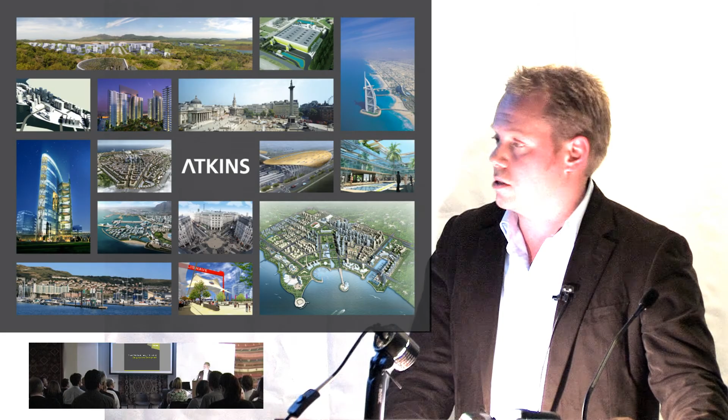I'm a principal landscape architect and urban designer from Atkins. About a year and a half ago, I was involved in the review of the way that our London team and our international businesses approach our master planning services.

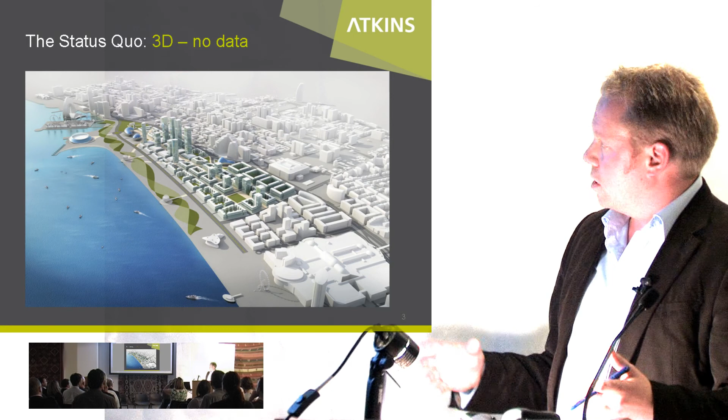Before I get into the tool and its application, I wanted to dwell for a few minutes on this image. This is the sort of thing we would find in any of our design documents, any design-led documentation that might come forward for a major master plan. It could be a third of that size, it could be 3-4 times that size, but ultimately the content is the same. It sets out to communicate a vision to the client and show them what our spatial design approach is for the site, and what they could expect to see if they took this vision forward.

What it doesn't have is any underpinning in terms of data and analysis. Atkins, along with many other practices out there, puts itself forward as a multidisciplinary practice, and we pull together multidisciplinary teams to give the client a robust approach to master planning.

But the reality is that if the client wanted to workshop this with us, and we made design changes, for us to come back to them with things like population numbers, utilities demand, transport demand and all this sort of thing, it would have to be remeasured. The measurements would go to our planning department, they would give us updated population numbers, that would go to our utilities team, who would analyse that and come up with updated utilities demand. We have these loops of activity, and I'm sure that's the same within any other major practice.

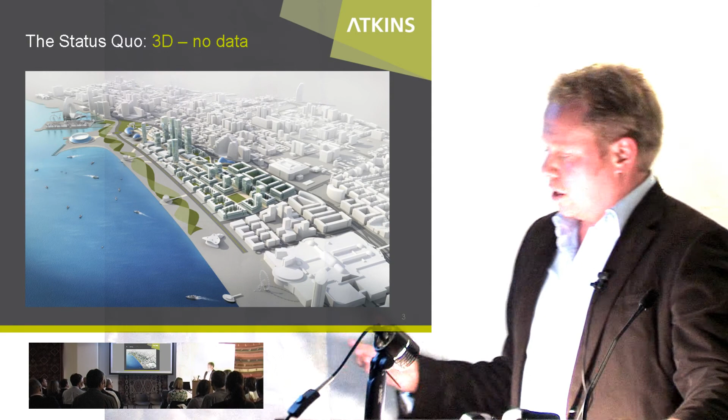This set us thinking about the revolution in BIM that is happening predominantly at an individual buildings level, whereby you have a central model, or central asset, which all the teams contribute to, and that in turn brings forward all of the data. Everything from utilities kit to materials to roof area for contractors and facade and everything else would come from the same model, and one design change would knock through the whole package.

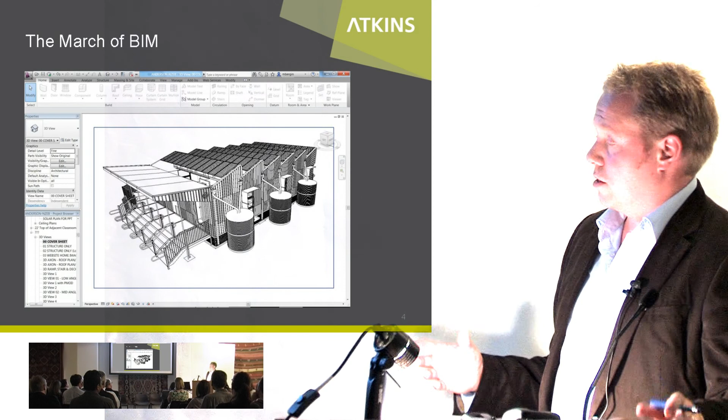So we started looking for an approach along these lines that we could take forward for our larger scale master planning work, up to and including the metropolitan scale. We looked at various packages, and some were more suitable than others. Autodesk openly said to us they thought it was a square peg in a round hole for us to use Revit, so we didn't take that forward.

And we ended up talking to a small company based in London called CityCAD, or Holistic City. CityCAD are a young architect called Chris Sharp, who I think comes down here every now and again, and a Russian mathematician called Svet, and their band of merry men. What they've done is build a tool specifically for master planners, and I think they worked with the University of Westminster, which is my old university, through the development of the tool.

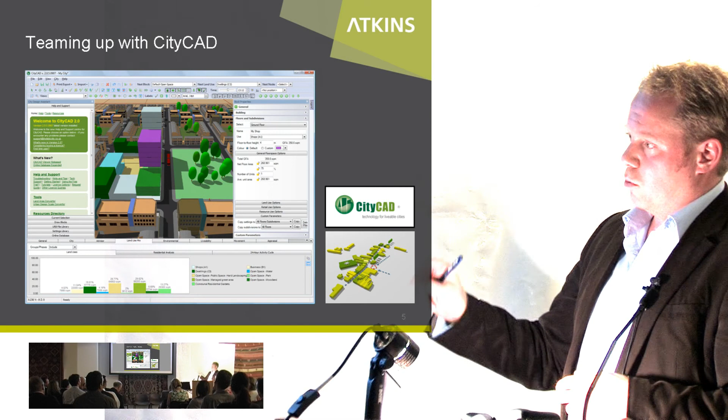What it does is, through a 3D interface which is very simple and intuitive to work with, allow you to track a whole range of parameters. In fact, every metric that you would want to look after and nurture as you developed a master plan, in one place and in one program. So one change to one building, a floor in one building or 3 buildings, would knock into population, trip distribution, all of this sort of thing.

In parallel with this, Atkins at our top group level were commissioning from within the company a series of carbon tools, and our chief executive Keith Clarke at the time was interested in putting together a portfolio of tools across our whole spectrum of businesses that allowed us to respond to some of the questions we were starting to get from our clients about how they respond to the climate change initiative and the carbon benchmarking of their projects.

Some of my colleagues in the planning team and sustainability put together a brief, which was ultimately accepted, to develop a master planning tool. So what we did was commission CityCAD and work closely with them to develop a custom version of their application, onto which we've bolted a web-hosted database which holds all of our carbon intelligence, if you like, and that talks directly to CityCAD and the custom version of the CityCAD user interface.

We've done a lot of development on the environmental capability of CityCAD. It was fairly crude before. But what we've done is talk to all of the various specialisms within Atkins to work with them on exactly what, if we were asking them to work within this model rather than in their own typical sphere, what are the knobs and bells that they would want to see and be able to manipulate to make the tool valid for their use.

So the tool in practice, I don't know whether anyone's seen it up and running. This is Atkins' custom version of it, and there are three basic parts to the tool, or its user interface, and I'll just quickly outline them.

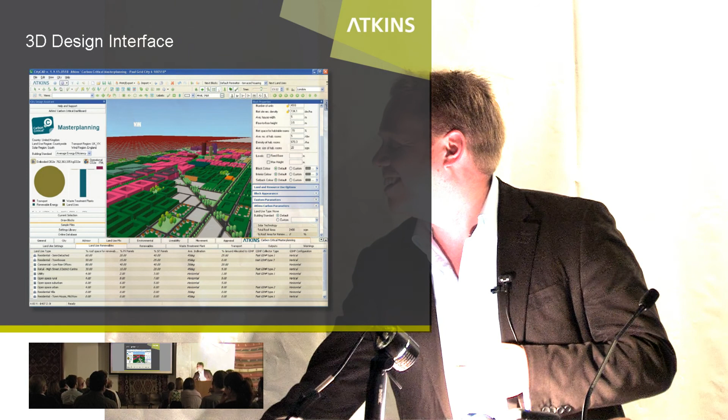The panel on the left is our summary carbon panel, which tracks the four key constituent parts of an overall carbon calculation: transport, waste, utilities and land use. So this gives us a kind of ready reckoner at any point.

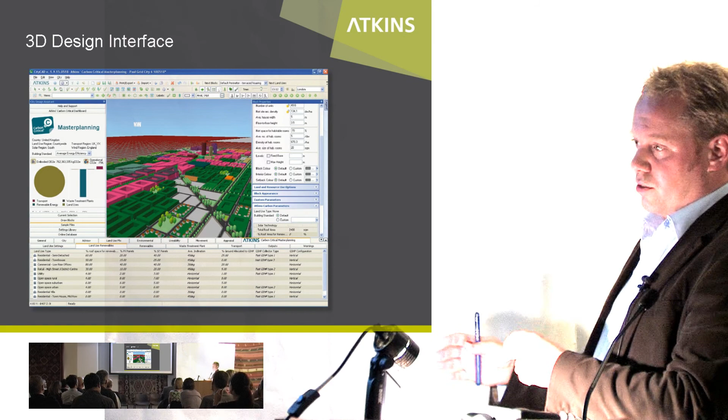The beauty of this, of course, is that because it's all based on a 3D interface, you can be sat with a client and the design team, and any change to any building or element, which can all be done quickly and intuitively, knocks right through the data set and changes all of your calculations on the fly.

A couple of our previous speakers have really touched on the idea that a new approach to master planning is needed, and that was something we were very keen on from the outset. For us as a company to do something where we could all work together in a way that really brought multidisciplinary teams together properly, where one change from one member of the team was an instant change and not something that involved us waiting three days for them to go through their loop of activity. It also allows us to bring our clients with us a lot more strongly.

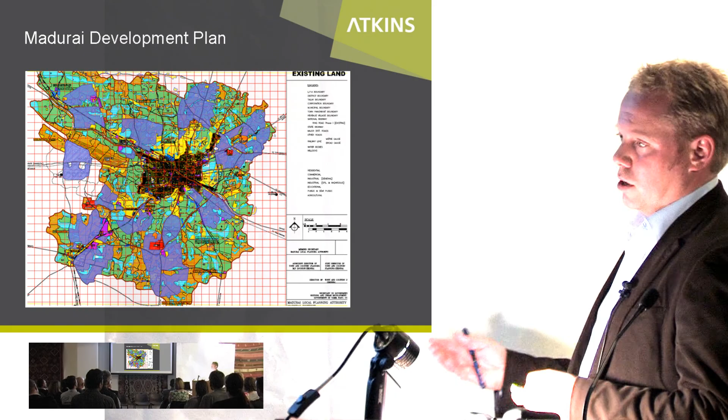Pretty straightforward stuff. But what we were able to do with the tool was to extract these hubs in their correct spatial location and plug them into CityCAD, assigning them the correct land use based on the urban typologies and land uses sat within the database from all the research our Indian colleagues had done and the data set that had been put together.

So the model effectively sees these mixes, and you can see one of the mixes being interrogated here - that's a land use mix for one of these cells. And it sees them spatially, recognising their centroid and their location.

One of the things it allows us to do is run a live transport trip distribution model within the model itself, which gives us daily trips and a transport carbon output. So it gives us the ability to do a quantitative assessment of the relative locations of these hubs, and use that as part of the optimisation process.

If you translate that into something like the UK design context - and the last speakers talked about analysing sites - if you took a major driver of trips like a hospital or a school, you could quite easily use this methodology to assess the carbon implications of relative locations of that to other urban centres around it.

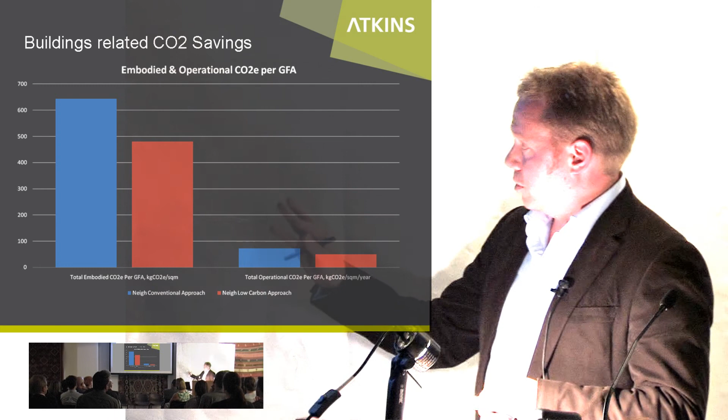Taking the summary high-level outputs from the carbon panel for any of these options at any given time, we're able to give them a system of outputs. This is the panel our planners use to give clients an easy to understand and track summary of how different approaches to development would yield results for them.

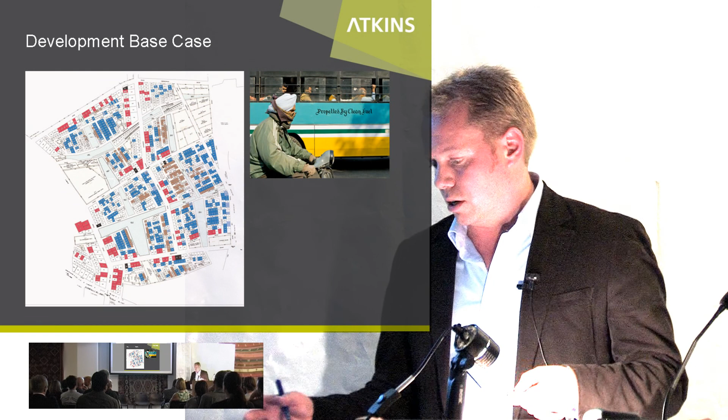Mysore, coming down a scale, is much more of an urban neighbourhood or district, depending on your terminology, and this is the kind of business as usual. We have very large developments entirely of villas of slightly varying plot sizes, and up there this will be the public services and commercial plot, where all the schools, shops, surgeries and everything else happens.

So everyone travels right across this thing to access that, and there's the irony of their bus propelled by clean fuel mantra in the top corner.

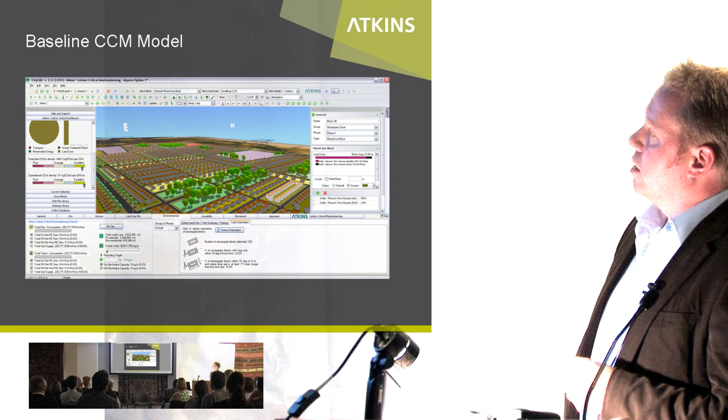This is what it looks like when you build that base case in CityCAD, so the client can relate to it because it's the look and feel of development they're already delivering. But what we're doing is setting up the data behind it to give us a valid base case from which to optioneer.

This is the sort of thing we can output when we start to do that optioneering. By defining different buildings or bits of floor space as different land uses, one of the things we can do is heat map the 3D model by any parameter at any time.

That parameter could be carbon, cost, trips generated, thermal demand or utilities demand. So it gives us a very quick way of doing what is actually a very technical optioneering process, but in a way that's instantly visually accessible by a client anywhere.

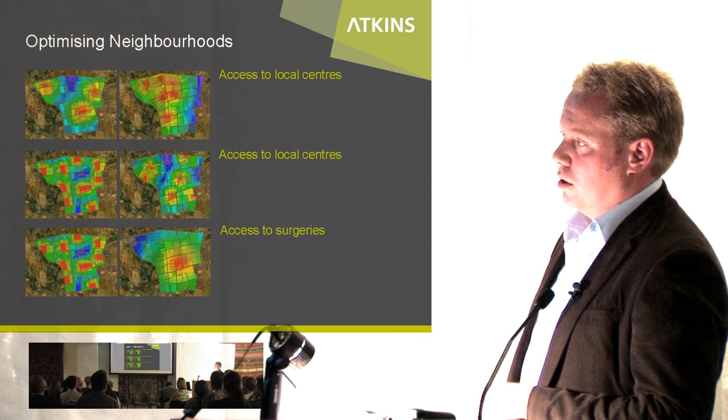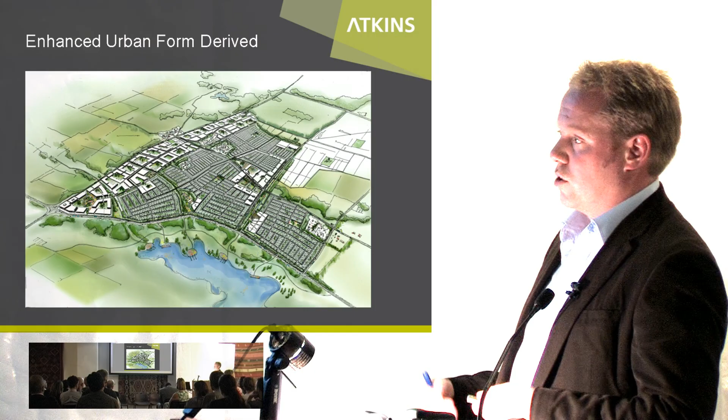Going back to the very first slide, instead of working in a spreadsheet and then trying to communicate a visual spatial strategy to a client, we're always in the realms of the 3D and the visual, but we're also tracking all of the data as we go. And that's it, thank you.